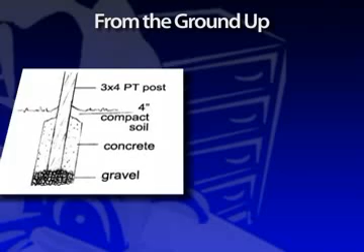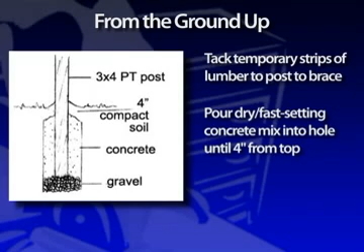To set a post, compact the bottom of the hole and place 6 inches of gravel or crushed stone in the hole for drainage. Place the 8-foot pressure-treated post and make sure it's level and plumb. Tack temporary strips of lumber to the post to help brace it. Pour dry, fast-setting concrete mix into the hole until it reaches about 4 inches from the top. Recheck that the post is plumb and level. You'll need to keep the temporary bracing in place while the concrete cures.

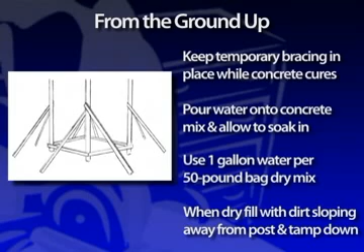Pour water onto the concrete mix and allow it to soak in. Use 1 gallon of water for each 50-pound bag of dry mix. When dry, fill the remainder of the hole with dirt, sloping it away from the post and tamping it down. Repeat this project for each of the 4 posts, making sure the outside corners of each post are square with the adjacent posts. The concrete sets up in about 40 minutes, but you need to wait about 4 hours before putting any weight on the posts.

These posts were laid out about 45 inches between each outside corner, so when the joists were added, you'd have a square 48-inch platform. Most plastic slides that you can buy in the store are designed for a 42-inch high deck. Since this one was being built on a downhill slope, a mark was made 42 inches up the front post and will hold the slide in position at that mark.

Due to the slope, with a 42-inch deck height, the slide would be a couple of inches shy from reaching the ground, so we dropped it a couple of inches so the slide would have a solid footing. This new mark, which wound up being 40 inches on the front post, is where the surface of the deck needs to be to allow the slide a 42-inch rise from start to finish. Knowing the finished height, plan the deck construction in reverse.

With the post still braced in place, fasten 4 2x6 floor joists in a square around the outside of the post. The top of the front joist ended up being about 39 inches high, so when the 1x4 decking is added, it equaled the deck height of 40 inches. Fasten the joints with lag bolts or 3 galvanized fasteners into each end. Butt the joints together for a flush 90-degree corner.

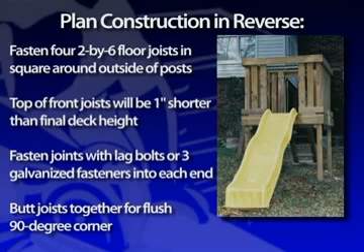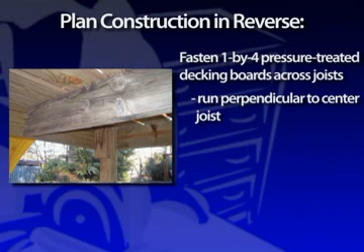Inside the square joist frame, fasten a third center joist to run perpendicular to the direction of the decking boards. You can toenail the center joist or use metal joist hangers to secure the ends. Once the joist system is in place, you can remove the temporary bracing. Next, fasten the 1x4 pressure-treated decking boards across the joists, perpendicular to the center joist, spacing them evenly about ½ inch apart to allow for easy drainage.

Secure each deck board on top of the 2x6 supports with 2 galvanized fasteners in each joist. The deck boards should be cut to finish flush over the joists. These wound up being 48 inches long. At the edges of the platform, you'll have to cut the decking to fit between the corner posts.

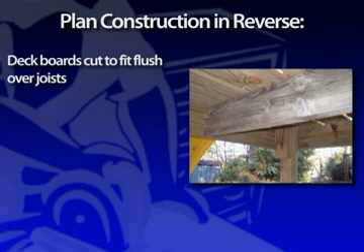Because the edge boards fit flush between the posts, nail blocking beneath them at the post intersection to provide a secure nailing surface below. The deck's rail system should be about 34 inches high. You need to install 2x4s in a square around the support posts. The top edges of 2x4s were 34 inches above the deck. Make sure that the corners are square and flush and everything is level.

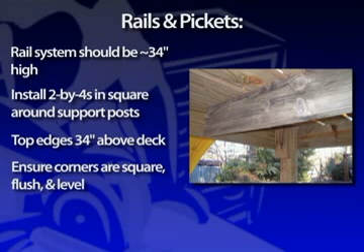Then use a handsaw or circular saw to cut off the posts flush with the top of the 2x4 framing. The front and rear platform openings were framed by 3x4 posts, spaced 19 inches apart, which were fastened to the top of the decking from beneath the platform. The tops of these posts were cut flush with the upper edge of the top framing and fastened securely to the inside of the 2x4s.

Also install a square frame of 2x4 face boards surrounding the corner posts where they meet the surface of the deck. Both the upper and lower 2x4 frames provide a secure nailing surface for the pickets of the platform walls. You'll have to leave an opening in the lower frame boards where the 2x4s meet the doorposts to allow for a 19-inch wide entrance and egress.

The 4 walls of the platform, except for the 2 openings, are completed by fastening 1x4 pickets evenly along the interior of the 2x4 framing. Keep the pickets tightly spaced, less than 1 inch, to prevent various toddler appendages from getting stuck between them. For a finished look, you can crown the post, pickets, and 2x4s with a 1x6 capboard with mitered corners, fastened flat onto the tops of the framing.

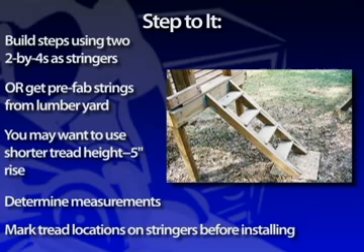You can build a simple set of steps using a pair of 2x4s as stair stringers, or get a set of prefab stringers from your lumberyard. However, since these stairs are built for short legs, you might opt to use a shorter tread height, say a 5-inch rise. When you've determined your measurements, mark the tread locations on the stringers before installing them. Here, 1x6 stock is used for the treads.

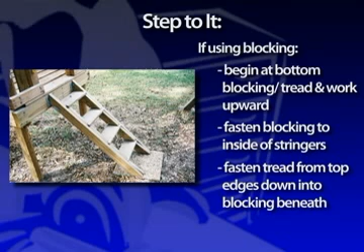You can fasten these to the inside of the stringers using metal hangers, or you can support the treads as shown in the photo by using 2x6 blocking that is mitered to fit flush beneath each tread on each side of the step. If you use the blocking technique, begin construction with the very bottom blocking and tread, and work upward. Fasten the blocking to the inside of the stringers, then fasten the tread from the top edges down into the blocking beneath. To help minimize water damage to the foot of the steps, place a concrete landscaping paver underneath the foot of the stringers.

The purchased plastic slide used came with all the necessary hardware to install it. Just drill mounting holes and twist on a few large bolts and washers, and the slide is ready for action. You might also want to install plastic handles on the entrance posts about 8 inches above the deck to give the kids an easy place to grab and climb in. And above the slide exit, mount a metal tube as a grab bar so the little folks can safely situate themselves in launch mode. Now enjoy your slide, and thanks for watching.